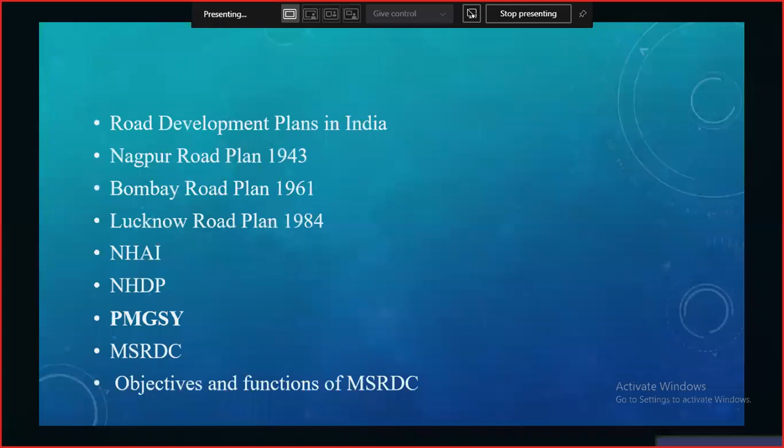In today's lecture we are going to cover these points: road development plans in India, that is Nagpur Road Plan 1943, Bombay Road Plan 1961, Lucknow Road Plan 1984, NHAI (National Highways Authority of India), NHDP (National Highways Development Project), PMGSY (Pradhan Mantri Gram Sadak Yojana), MSRDC (Maharashtra State Road Development Corporation), and objectives and functions of MSRDC. We'll see them one by one.

In the previous lecture we saw that the Indian Roads Congress, IRC, was formed by the Government of India in order to collect ideas and expertise for planning and development of roads in the country, and to undertake maintenance and research as required. Certain objectives were decided by the IRC, and after that the road development plans came into existence, starting with the Nagpur Road Plan, then the Bombay and Lucknow Road Plans. Other plans exist too, but we start with these.

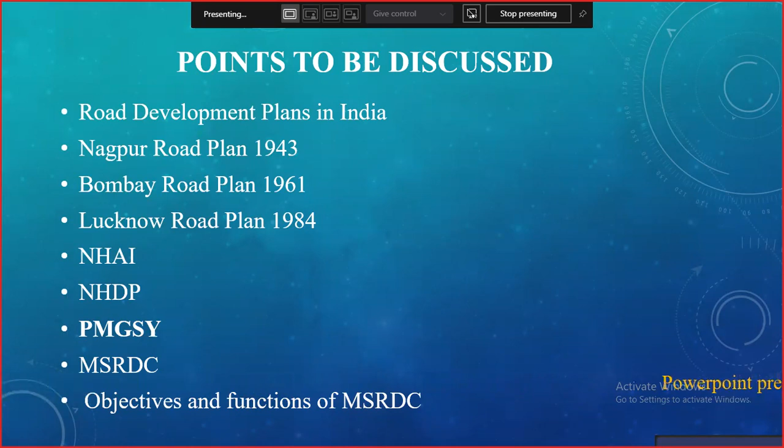Before the IRC, a Jayakar Committee was formed, which was just according to the IRC. So we'll see the road development plans in India one by one.

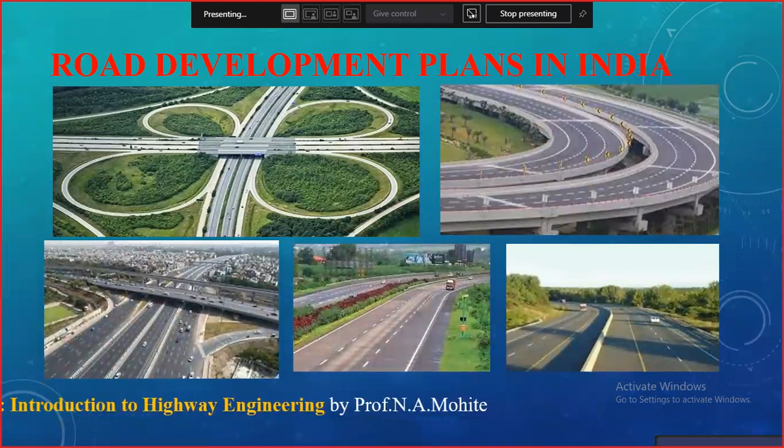In order to get clear ideas on what type of road is to be constructed, how the classification of the road is to be done, what should be the width of the pavement, and what material should be used for construction, depending upon such classification or importance of the road, the development plans were developed in India step by step.

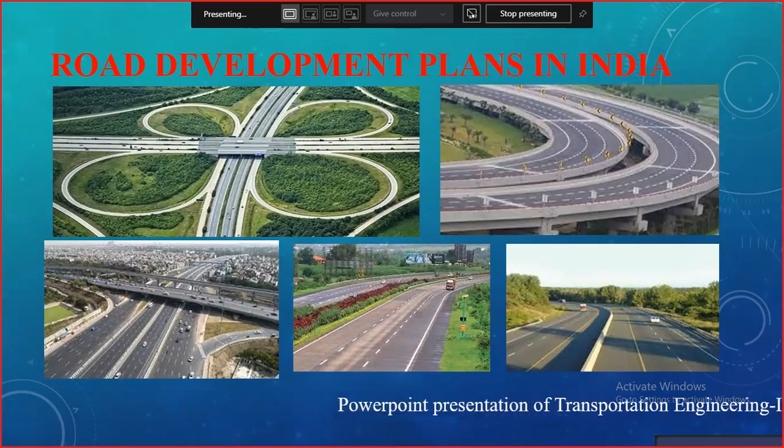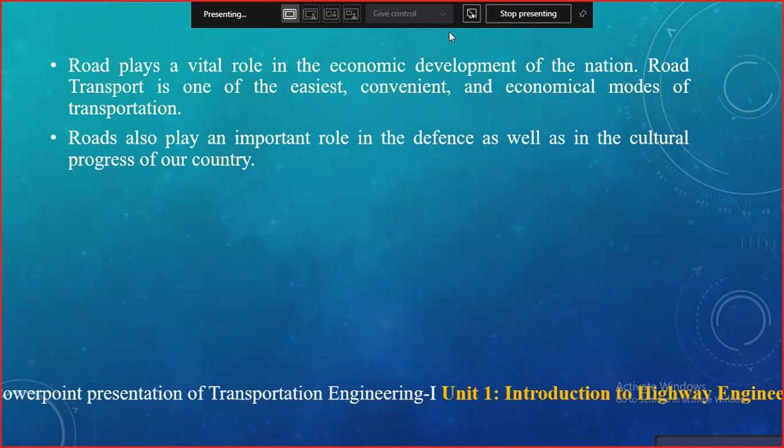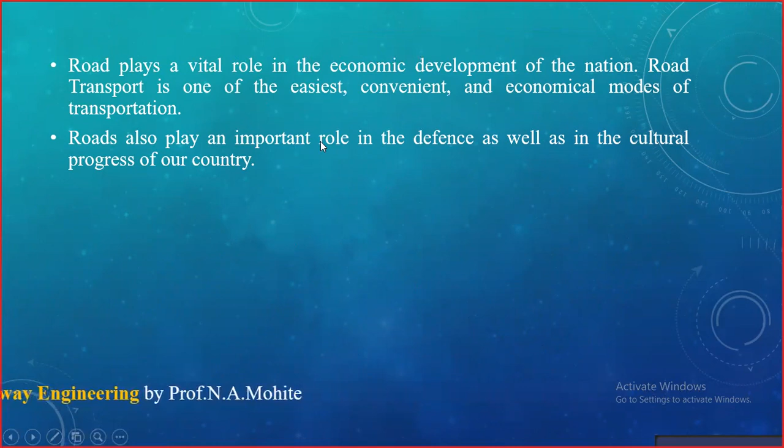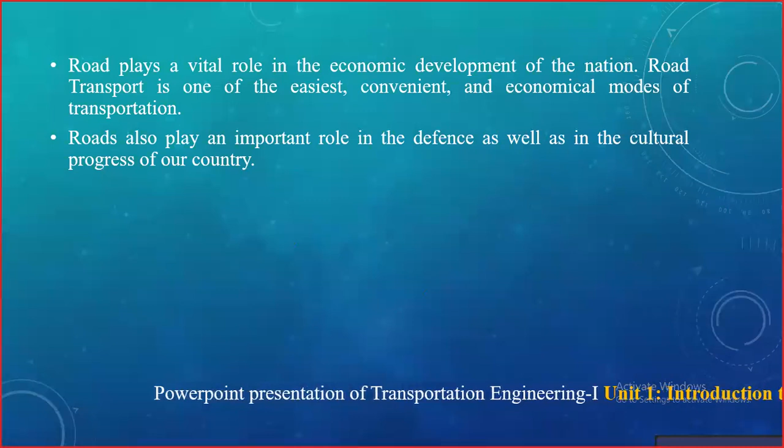We know that road plays a vital role in the economic development of the nation. It is one of the easiest, convenient, and economical modes of transportation. It also plays an important role in defense as well as the cultural progress of our country, forming an important strategic role in infrastructure development and in transferring knowledge between nearby states and within the nation.

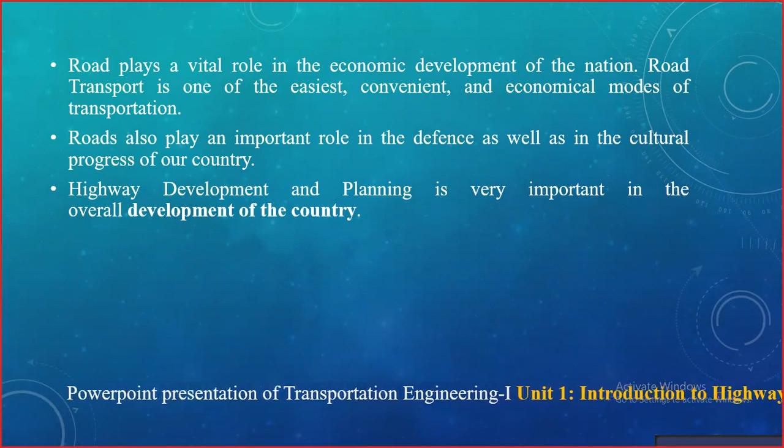Highway development and planning is very important in the overall development of the country. Unless road development takes place, the progress or overall development of that particular area, or the country in general, doesn't take place. It deals with planning, development, traffic operation and control, pavement design, construction and maintenance of roads.

After the end of the First World War, the demand for a better road network increased, and the existing roads in India were not capable of carrying the heavy traffic going on in transportation. So after the First World War, the needs and specifications required were laid down and the work was carried out.

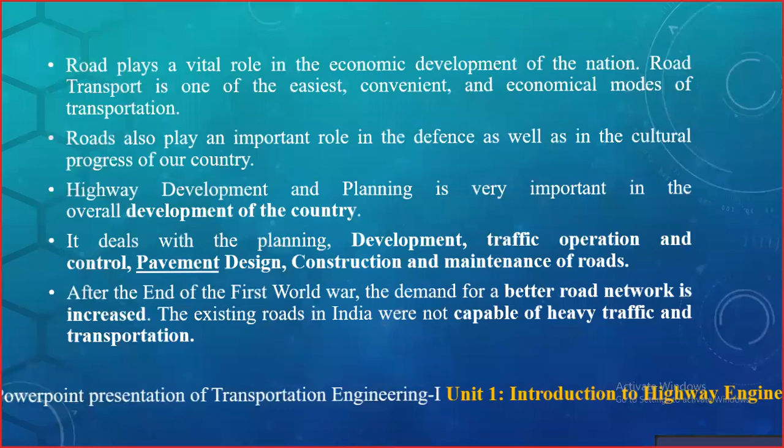Moving further, highway planning and development in India: there are three plans - Nagpur Road Plan formed in 1943, Bombay Road Plan in 1961, and Lucknow Road Plan in 1984. Each was planned having a duration of 20 years.

After the Nagpur Road Plan started in 1943, adding 20 years gives 1963. But the target decided in 1943, to complete within 20 years, was actually completed 2 years before. So the Bombay Road Plan was revised and converted to 1961, likewise the Lucknow Road Plan. We'll see them one by one.

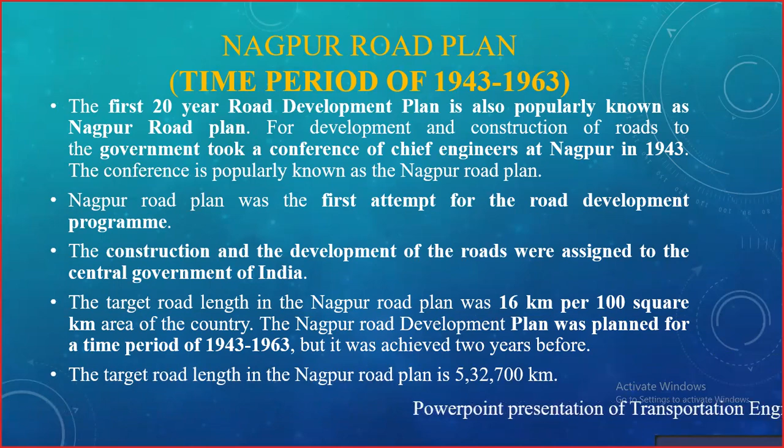In this first 20-year road development plan, all roads were classified into 5 categories: national highways, state highways, major district roads, other district roads, and village roads. In this conference, it was decided that a systematic development should be done of the roads, for forming proper road networks. The target road length in the Nagpur Road Plan was 5,32,700 kilometers. Moving further, next was the Bombay Road Plan.

As the target duration of the Nagpur road development plan was achieved 2 years before, the Bombay Road Plan started in 1961 only. Adding 20 years to that, it was supposed to be completed by 1981. The second road development plan was initiated by the IRC, that is Indian Roads Congress, in the year 1959 only, and the target length was 32 kilometers.

In the Nagpur Road Plan, it was 16 kilometers per 100 square kilometers, but here you can see there was an increase. As they achieved the target 2 years before, they increased their rate of construction of the road, and decided to construct 32 kilometers per 100 square kilometers. The total length that was planned was 10,57,330 kilometers.

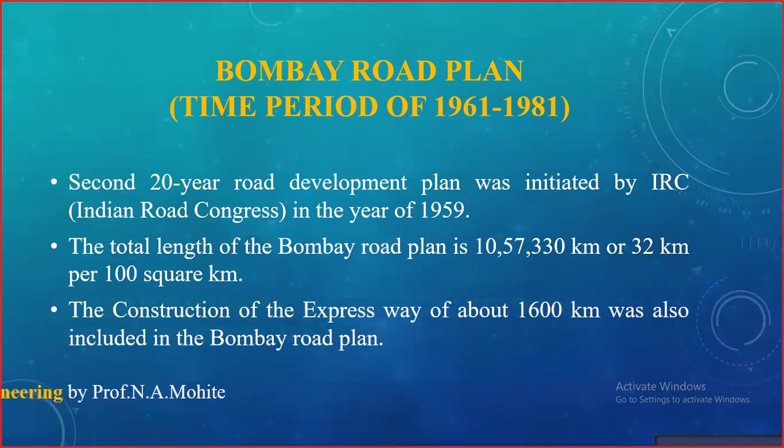The construction of the expressway of about 1600 kilometers was also included in the Bombay Road Plan. So this was regarding the Bombay Road Plan.

Moving further to the Lucknow Road Plan, it was again from 1981 to 2001. Each road plan has a duration of 20 years. The third road plan was prepared by the road wing of the Ministry of Shipping and Transport with the cooperation of various experts and organizations in the field of highway engineering and transportation. The work was supposed to be carried out by this body only.

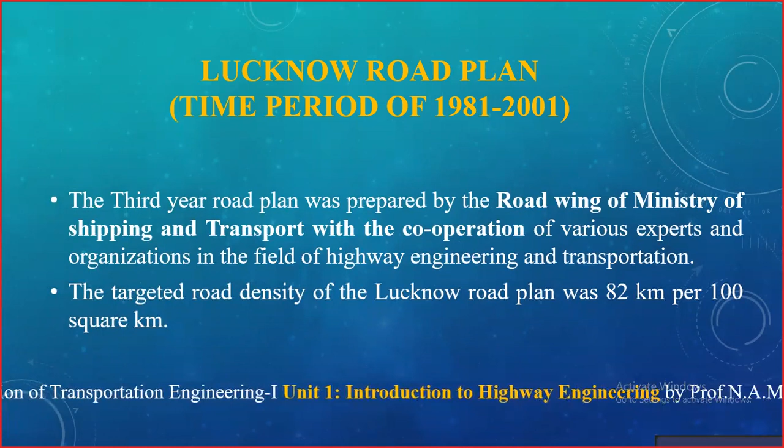The targeted road density of the Lucknow Road Plan was 82 kilometers. So you can get an idea: initially for Nagpur, it was 16 kilometers per 100 square kilometers, then for the Bombay road development plan it was 32 kilometers per 100 square kilometers, and in the Lucknow road plan it was 82 kilometers per 100 square kilometers - that is the targeted road construction.

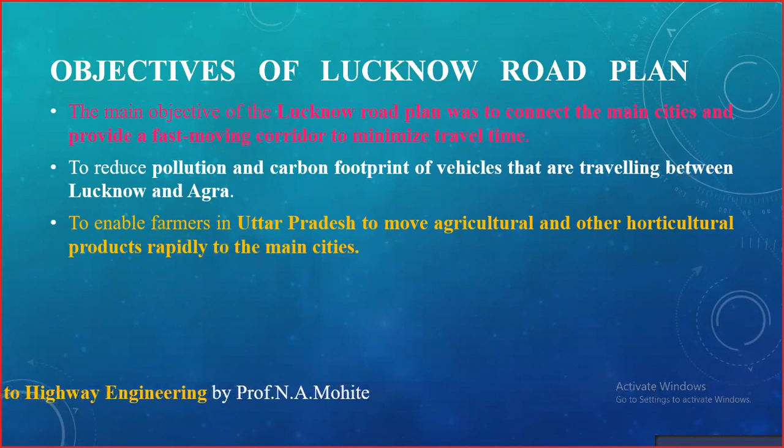There were certain factors considered as objectives of the road development plan. The main objective of the Lucknow Road Plan was to connect the main cities and provide a fast-moving corridor to minimize travel time, to reduce pollution and carbon footprint of vehicles traveling between Lucknow and Agra, and to enable farmers in Uttar Pradesh to move agricultural and horticulture products rapidly to the main cities for the efficient and safe movement of traffic on the roads.

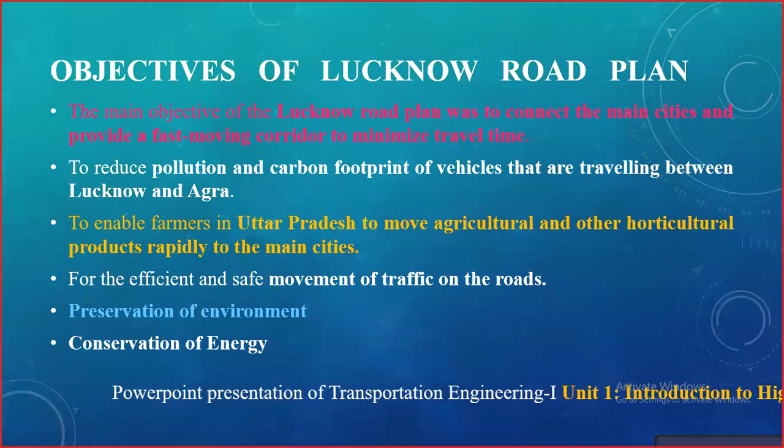Other objectives included preservation of environment, conservation of energy, and overall improvement of road safety. These were the objectives of the Lucknow Road Plan. The classification that was done by the Nagpur Road Plan was revised in this Lucknow Road Plan, which we'll see next.

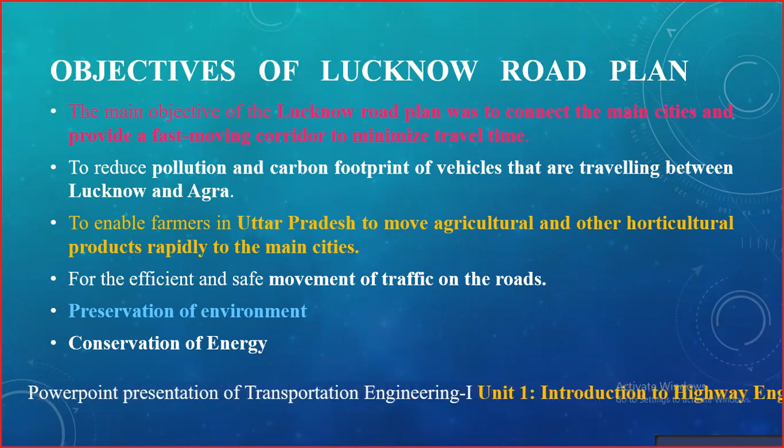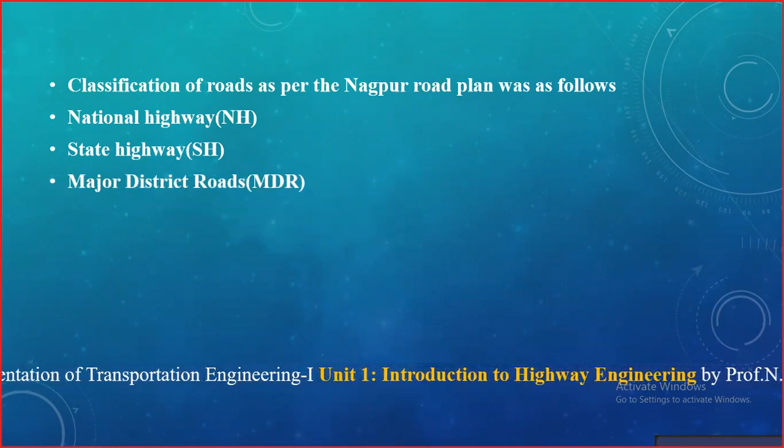So in the Nagpur road plan, correspondingly, the classification of the roads were as follows: we have national highway (NH), then state highway (SH), then major district roads (MDR), then other district roads (ODR), then village roads (VR).

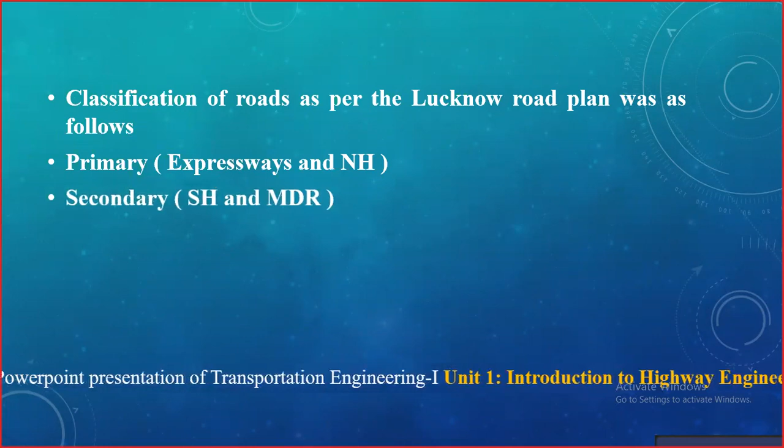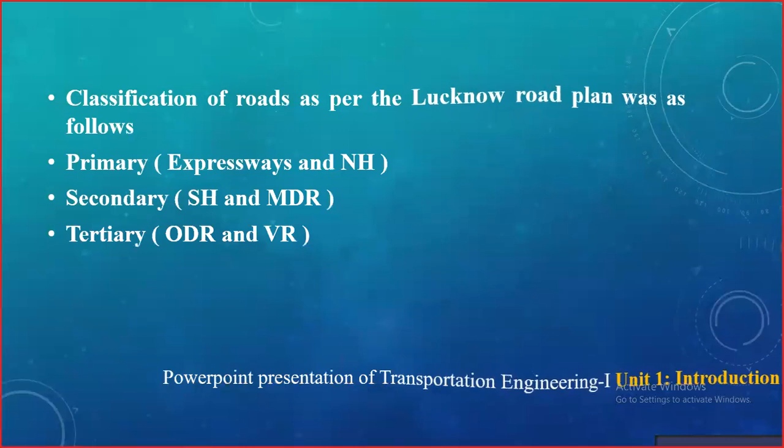But in the Lucknow road plan, it was revised and classified as primary, secondary, and tertiary. Primary included expressways and national highways. Secondary included state highways and major district roads. Tertiary included other district roads and village roads. So it was revised.

So IRC's road development plan vision 2021 correspondingly targeted an additional 22,000 kilometers of national highways to be constructed up to 2021, thereby raising the total length of national highways to 80,000 kilometers. A target of 10,000 kilometers was supposed to be constructed in addition to the previous 1,600 kilometers of expressways.

So it is supposed to be constructed till then. Correspondingly, they decided to levy a certain tax on petrol and diesel, amounting to rupees 6,000 crores per year, which will be utilized for developing roads or overbridges, etc.

Next point is NHAI, that is National Highways Authority of India. This NHAI was formed under the NHAI Act in 1988. NHAI is an autonomous organization that looks after the management of the complete network of national highways in the country.

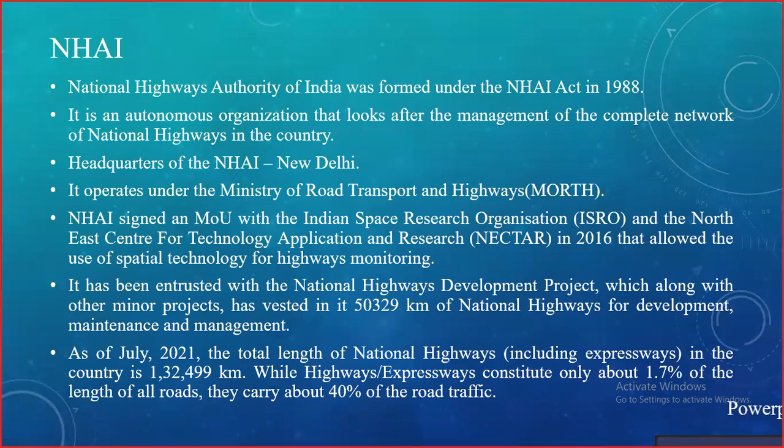All this information, whatever values have been represented here, is available on the NHAI official website. You can check these values there. That was the latest value.

Next is the NHDP, National Highways Development Project. NHAI formed this NHDP, so that whatever work is supposed to be done should be done under the NHDP only. There were certain phases through which it was decided, like in a development or road plan, what type of road should be constructed, what should be the length, and where to give importance. NHAI has the mandate to implement the national highway development projects.

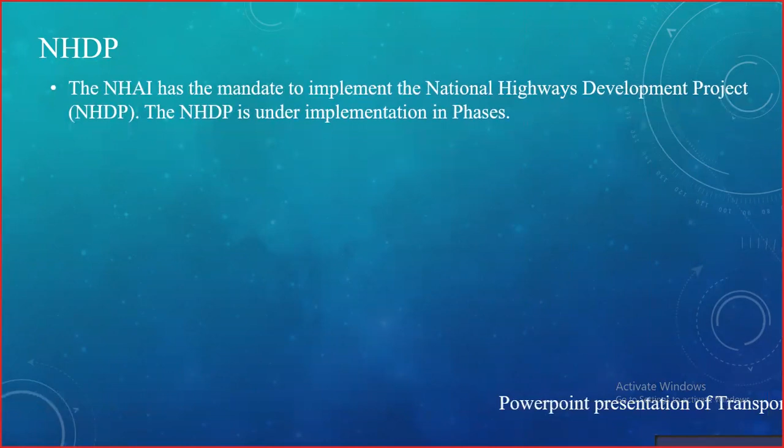Under this, there are phases. In phase 1, approved in December 2000, at an estimated cost of rupees 300 billion, that is 30,000 crores, it included the golden quadrilateral portions, portions of the north-south and east-west corridors, and the connectivity of major ports to national highways.

The golden quadrilateral joins the major cities in our country, that is Delhi, Mumbai, Chennai, and Calcutta, along with the north-south-east-west corridor, which connects Srinagar in the north to Kanyakumari in the south, and Silchar in the east to Porbandar in the west.

The length of the golden quadrilateral as constructed was 5,846 kilometers. The north-south-east-west corridors were 981 kilometers, including port connectivity of 356 kilometers, and others of 315 kilometers.

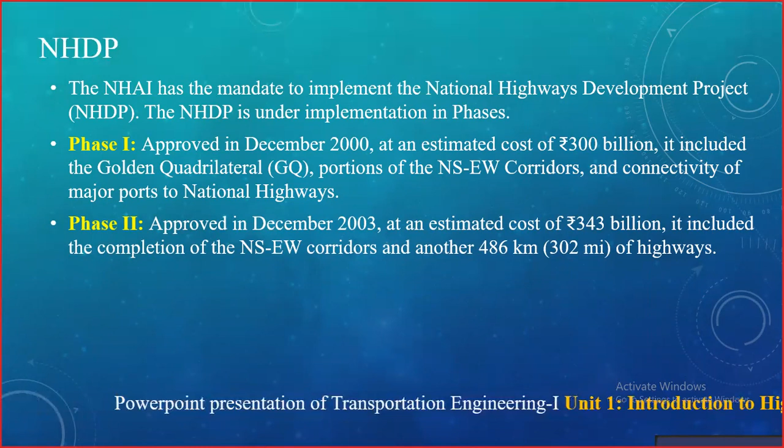In phase 2, approved in December 2003 at an estimated cost of rupees 343 billion, it included completion of the north-south-east-west corridors and other 486 kilometers of highways. This corridor connects Srinagar in the north to Kanyakumari in the south, and Silchar and Porbandar in the east-west direction.

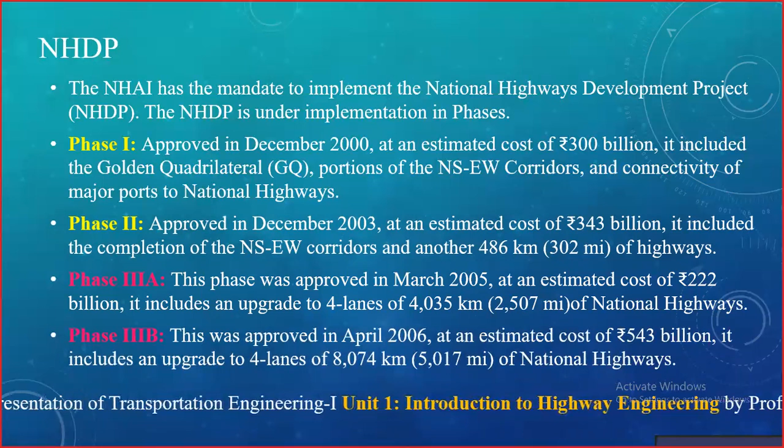Later, phase 3 was approved in March 2005 and 2006 at an estimated cost of rupees 222 billion, which includes an upgrade of 4 lanes corresponding to 4,035 kilometers of national highways, on BOT basis, that is build, operate and transfer basis. Whatever upgradation was done was based on BOT. In Marathi, this is called बांधा वापरावं हस्तांतरित करा, which is nothing but BOT.

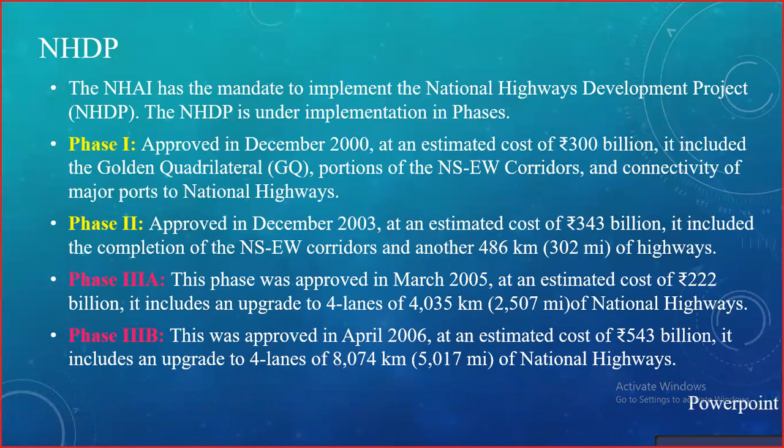Later, phase 3B was approved in April 2006, at an estimated cost of rupees 543 billion, which includes an upgrade to 4 lanes in addition to 4,035 kilometers, totaling 8,074 kilometers of national highways.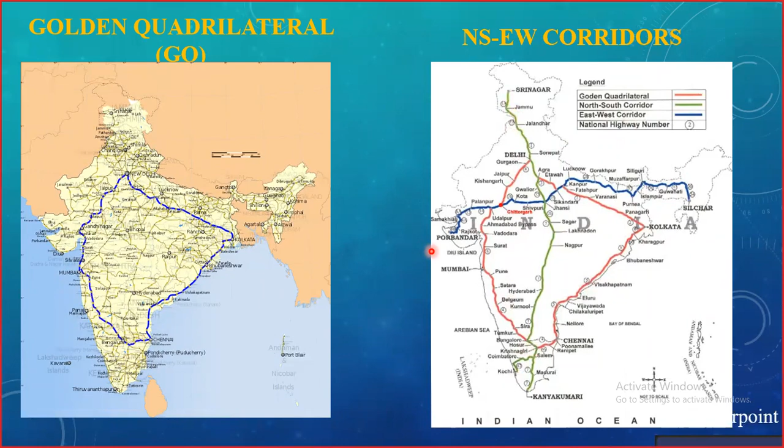Moving further, after phase 3, phase 4 was there, which includes widening of 20,000 kilometers of highways and converting existing single lane highways into 2 lanes with paved shoulders. Till now, paved shoulders were not included, so it was supposed to be included in that phase.

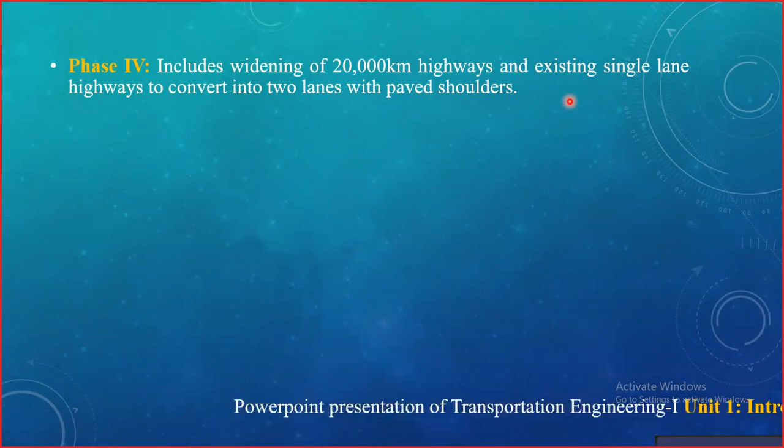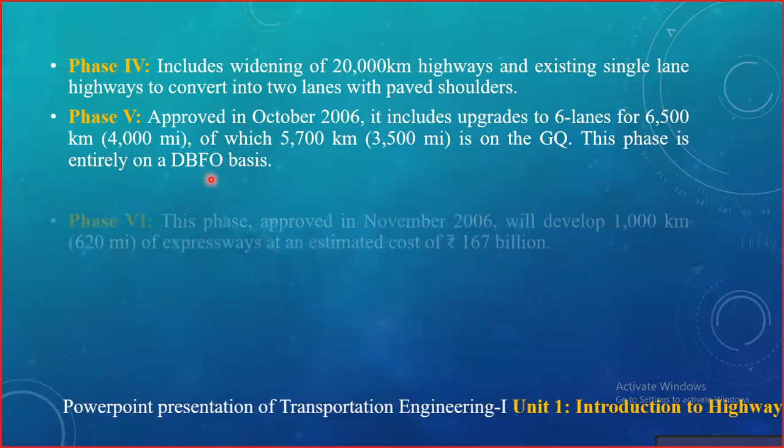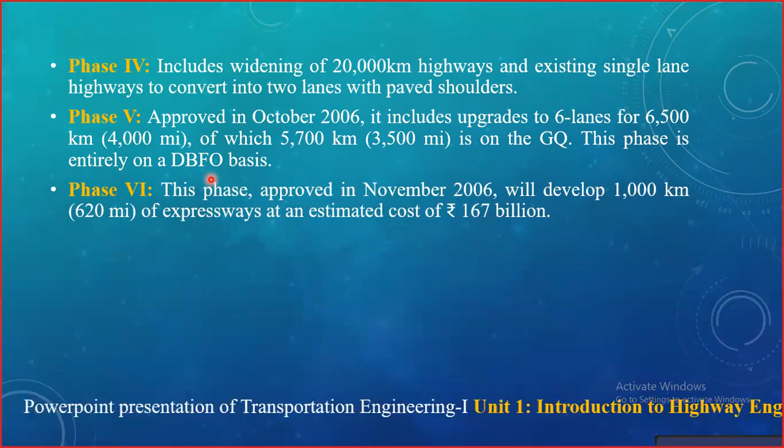Phase 6 was approved in November 2006, and will develop 1,000 kilometers. Later, phase 7 was approved in December 2007, which will develop ring roads, bypasses and flyovers to avoid traffic bottlenecks on selected stretches, at a cost of rupees 16,680 crores, that is 167 billion. As research was going on, it was found that certain bypasses, ring roads, or flyovers needed to be developed so that traffic at a particular road or highway could be avoided.

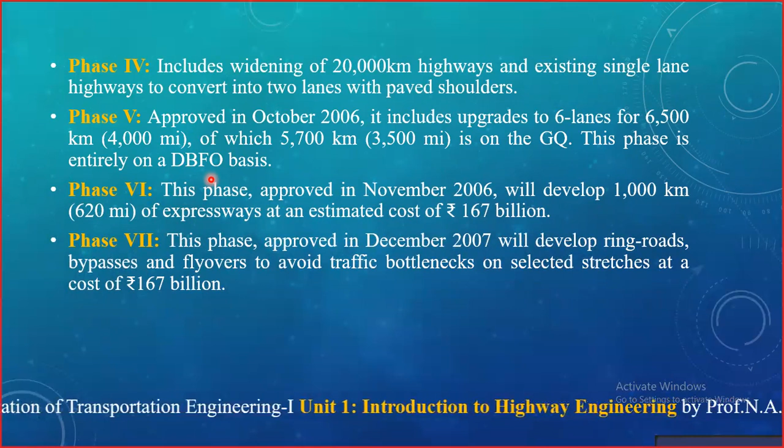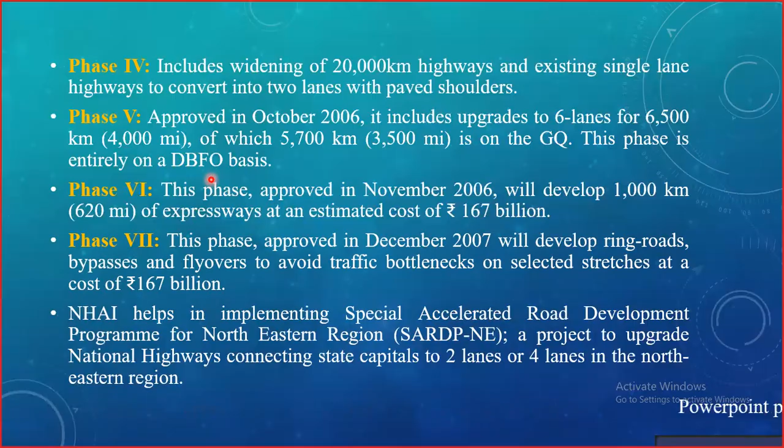These were the certain phases that were developed under the NHDP. The NHAI helps in implementing the Special Accelerated Road Development Program for the northeastern region, a project to upgrade national highways connecting state capitals to 2 lanes or 4 lanes in the northeastern region. That was dealing with NHDP.

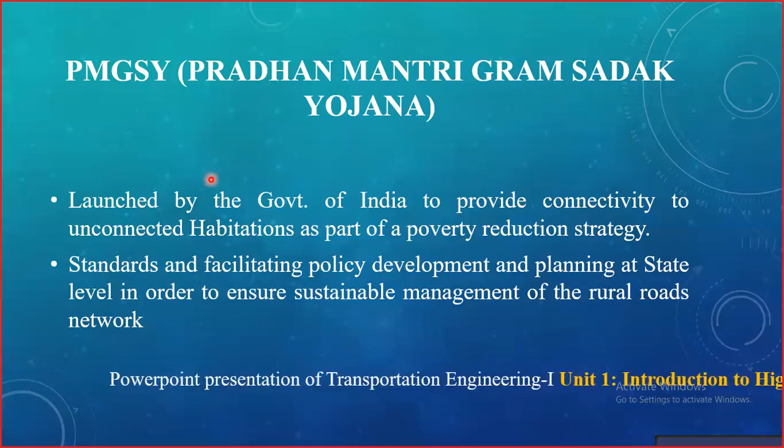Now we move to the further point, that is PMGSY, the Pradhan Mantri Gram Sadak Yojana, which was launched by the Government of India to provide connectivity to unconnected habitations as part of a poverty reduction strategy. As I told you, road development decides the overall development of the country. It was decided under PMGSY to connect poor areas, and standards and facilitating policy development were done under this PMGSY, along with planning at the state level, in order to ensure sustainable management of rural road networks.

And last part, that was MSRDC, Maharashtra State Road Development Corporation Limited. In Marathi, we call it Maharashtra Rajya Raste Vikas Mahamandal Maryadit. You might have seen the board like this.

This is fully owned by the Government of Maharashtra and was established on 9th July 1996, incorporated as a public limited company under the Companies Act 1956 on August 2nd, 1996. It is responsible for developing, building and maintaining roads in Maharashtra.

Whenever you see roads being constructed, you might have seen boards saying welcome to Maharashtra, showing whatever roads are constructed by that particular state. When you leave one state and enter another, they write their name stating welcome to this state and the roads constructed by that state. So MSRDC is responsible for building, maintaining and developing roads in Maharashtra.

MSRDC has completed its 25th anniversary as on 9th July 2021. So 25 years have been completed since forming the MSRDC.

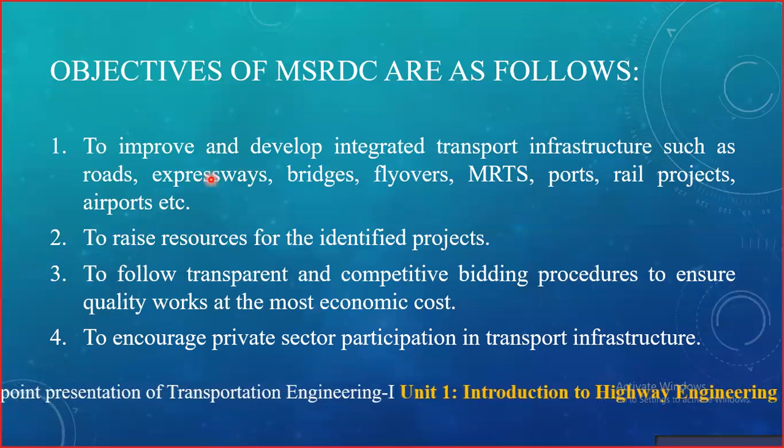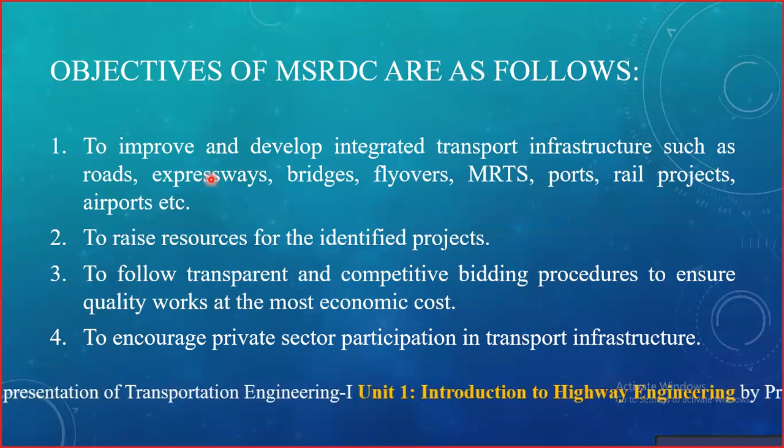Why? Because whenever roads have been constructed in a particular area, while traveling you might have seen boards with names of the companies written there, as they are providing the finance for constructing that road. So that is nothing but encouraging private sector participation.

So these were the objectives of MSRDC. This corporation tries hard to deliver exceptional, strategic, and integrated infrastructure services to the state of Maharashtra, which encourages the use of state-of-the-art construction technology to reduce construction period.

These major functions of the MSRDC corporation are to promote and operate road projects, then to plan, investigate, design, construct, and manage identified road projects and the area development.

Then to enter into a contract in respect of the works and any other matters transferred to the corporation along with assets and liabilities. Then to invite tenders, bids, offers, and enter into contracts for the purposes of all the activities of the corporation.

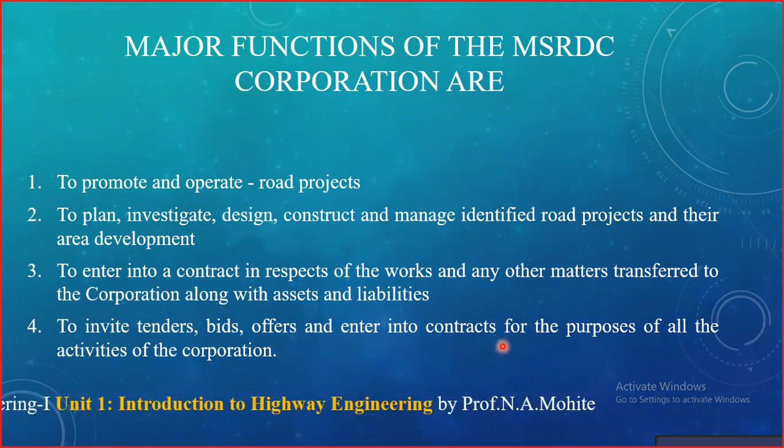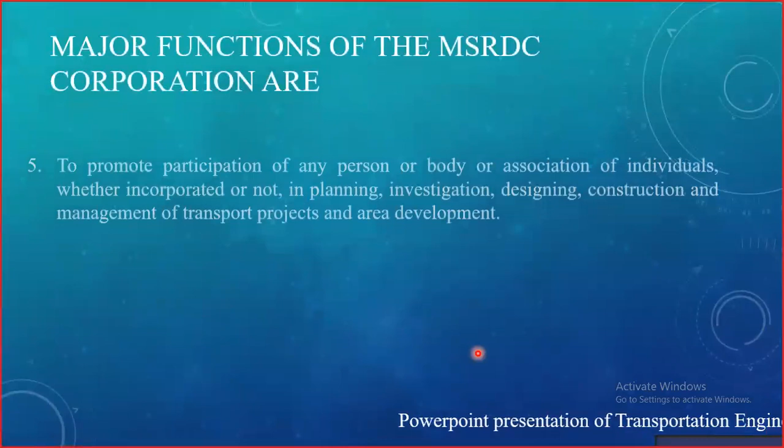There are in all 7 functions. To promote participation of any persons or body or association of individuals, whether incorporated or not, in planning, investigation, designing, construction and management of transport projects and area development.

As we have seen, they are giving chance to expert persons in that field. So they can put up their ideas and work over that, and correspondingly whatever is the work, they can work on it.

So to undertake schemes or works either jointly with other corporate bodies or institutions or with government or local authorities, or on an agency basis, in furtherance of the purposes for which the corporation is established and all matters connected therewith.

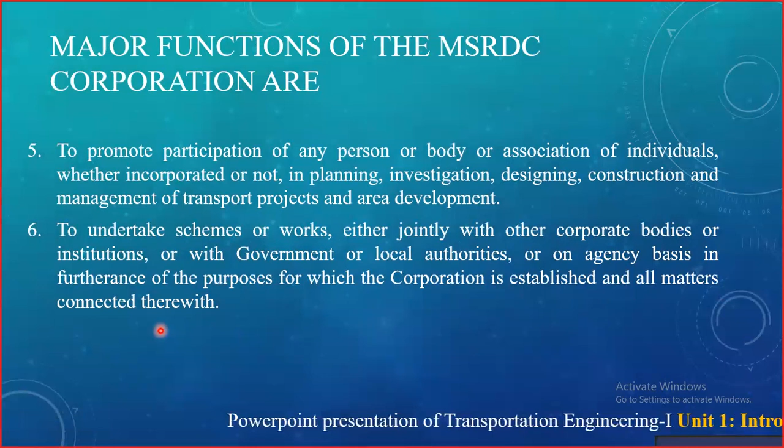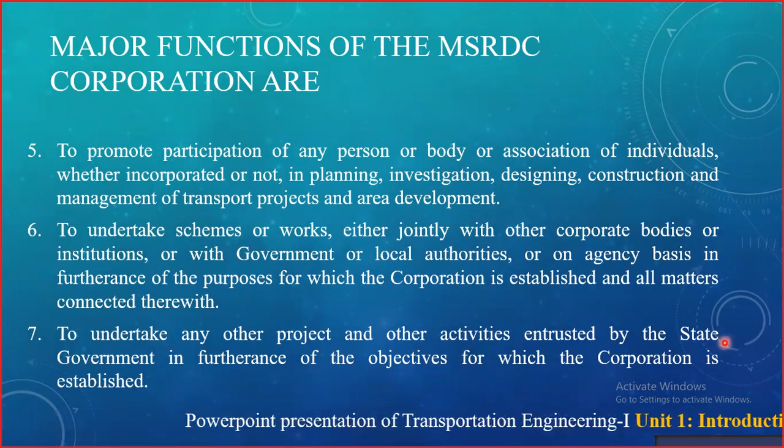And the last function is to undertake any other project and other activities entrusted by the state government in furtherance of the objectives for which the corporation has been established. So these are the various functions of the MSRDC corporation.

So here we will stop for today's lecture. In today's lecture, we have seen the NHDP, NHAI, correspondingly road development plans, Nagpur road development plan, Bombay road plan, Lucknow road plan, how classification was done of the roads as per Nagpur and Lucknow road plans, and what were the corresponding phases taken into consideration by the NHDP.